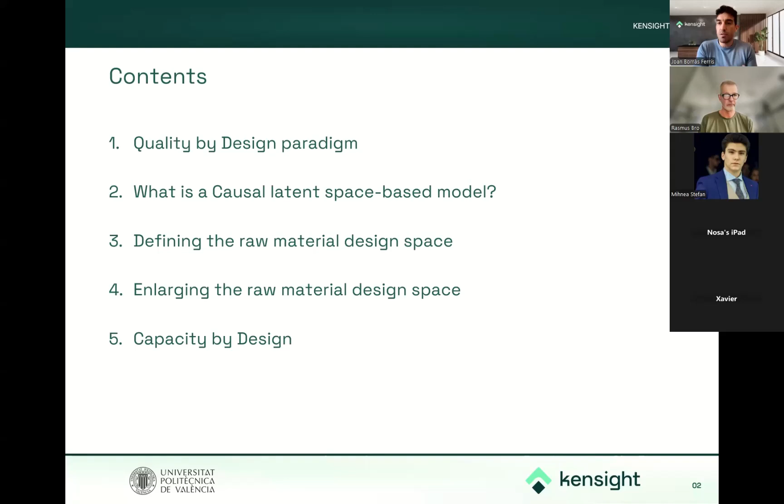So these are the contents of this webinar. First, I will talk a little bit about the quality by design paradigm, then about the causal modeling, and finally, I will talk about the 3 applications where we will use these ideas.

So first, the quality by design paradigm. For that, we have to understand that we can summarize a process using the idea of the input variables, where we have, for example, raw material properties and some process variables, and then we have the quality space, the Y space, which is also called the critical quality attributes.

So in the quality by testing paradigm, let's say, we focus only on the quality space. If we want to ensure the quality of our product, we have to test, to check the properties of the quality. But sometimes this is a problem because we cannot test everything, or it's quite expensive, and because we have to wait until the end of the process.

For this reason, another paradigm arises in the pharma industry, which is called the quality by design paradigm. Now, we don't focus only on the quality space, but also on the input space. We look at the raw material properties and the process variables. So now we don't have to test everything, and we don't have to test a sample of the quality.

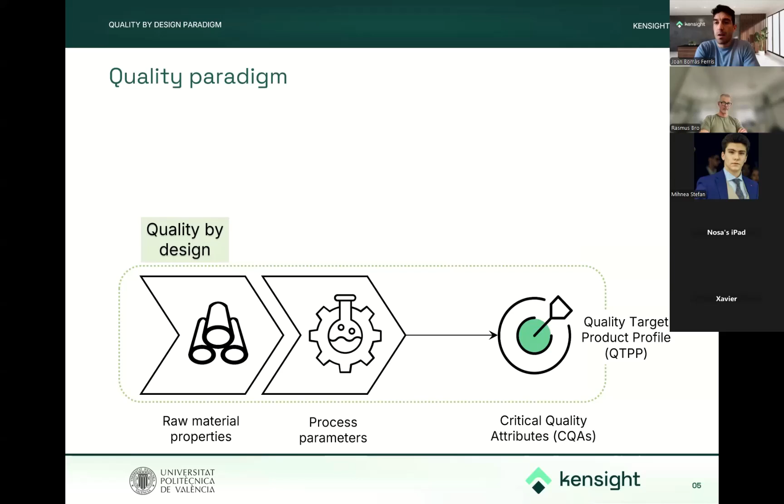We define the quality target of our quality space, and then we look at the space of the quality by design paradigm, where we have the knowledge space. It consists of everything that we know about the process. Then we have the control space. The control space contains the normal operating ranges, and then we have the design space.

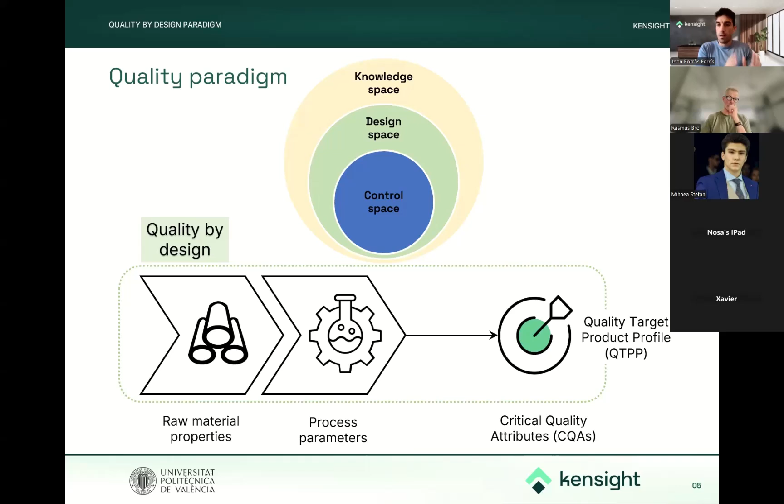The design space is very interesting because it's related to the quality target. This is the multidimensional combination of the raw material properties and the process variables which guarantee the quality of our process. So now we are interested in defining properly this space, because if we are able to do that, and if we work within this space, there is no need to test everything. We ensure the quality of our product looking at our process, the raw material properties and the process variables.

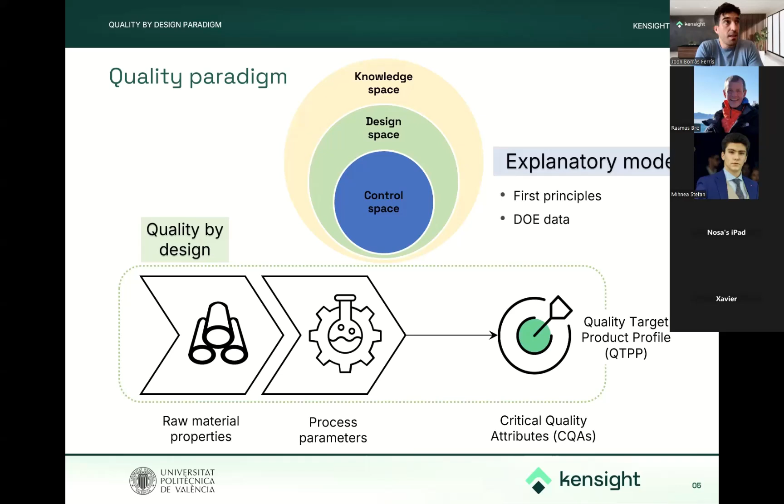But for that, we need causal models. We need explanatory models. And we can build these models using, for example, first principles or data from a design of experiments. But what is the problem in Industry 4.0 when we look at the processes? That if we look at the box of the data from DOE or first principles, it's empty. It's quite difficult to find this kind of data or information.

So it's difficult to build this kind of explanatory model, which are causal. But otherwise, we have a huge amount of historical data, which is called the so-called happenstance data. But be careful, because we can use this data to build predictive models, which take into account the association between X and Y, but not the causality from X to Y.

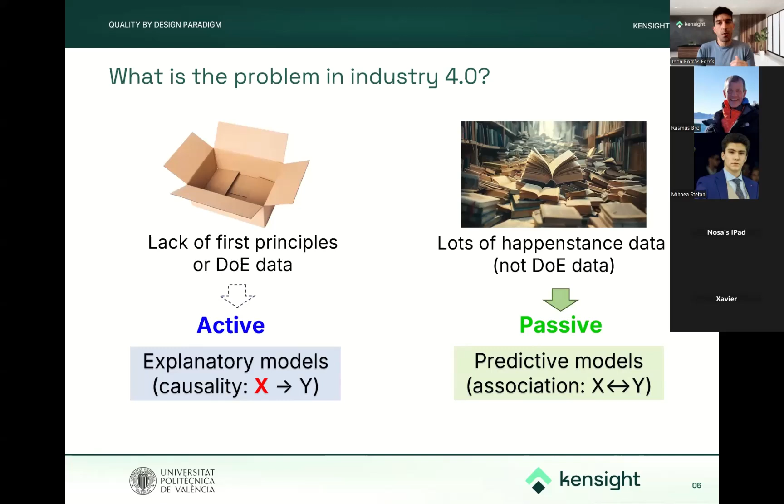So I know that there is a temptation to try to build these explanatory models using historical data, but be careful. According to the warning of Professor Box, we cannot do that. We cannot infer causality in the original space using historical data. But there is an idea from Jaeckle and MacGregor where we can do it using latent variable-based models. So now we are going to see quickly these models.

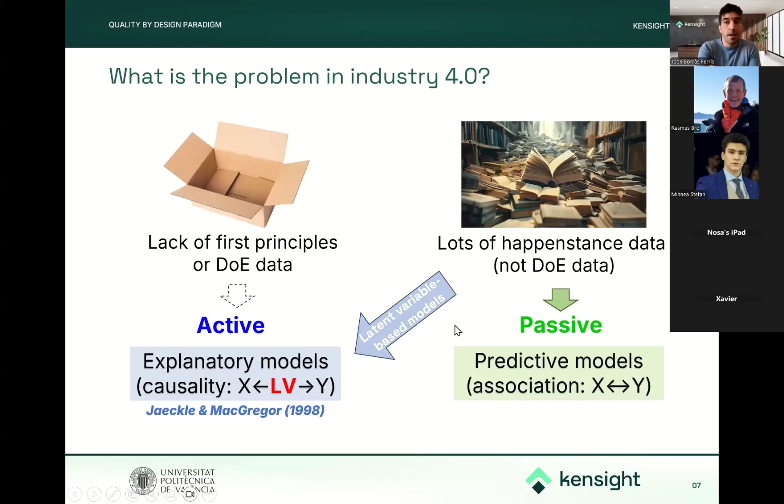As Professor Rasmus Bro said, there is a webinar Alberto did 2 weeks ago, and he explains very well the idea of these models. Anyway, I'm going to talk only a few minutes about them to remember the main ideas. So these kinds of models are, for example, partial least squares regression, which is also called PLS. And to understand this model quickly, here we have a simple example where we have 3 input variables and 3 quality variables. And we build a PLS model using only 2 latent variables. So here we summarize both spaces in only one.

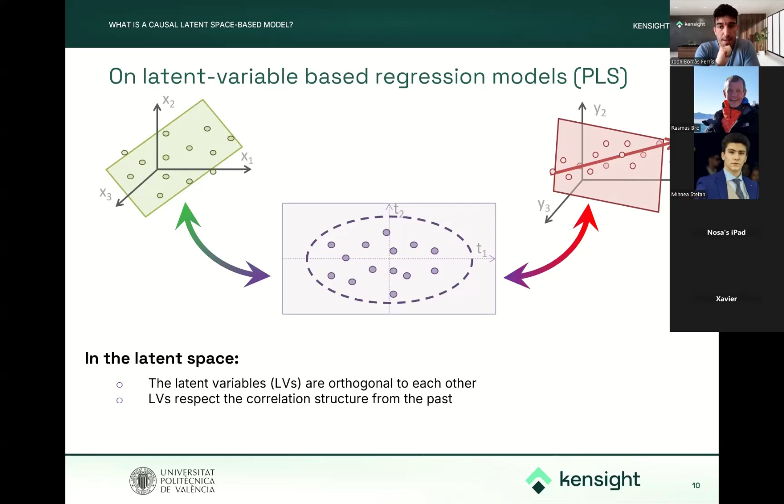So regarding the properties of PLS, we know that the latent variables are orthogonal to each other, which is very important because now we can move one of them independently from the other one. They respect the correlation structure from the past. So if we have a solution in the latent space, we know that it will be feasible because it respects this information. And here we not only model the relationship, but also provide a model for both spaces.

So taking into account these properties, Jaeckle and MacGregor explain that it provides uniqueness and causality in the reduced latent space. But what does it mean? Does it mean that if we have a movement in the X space, we will know the movement in the Y space? Of course not, because that means causality in the original space. So what Jaeckle and MacGregor said is that if there is a movement in the latent space, we will expect a movement in both spaces. And we will know that this movement in the latent space will respect the correlation structure from the past. So we are constrained to the latent space. So we talk about causality through the latent space, through the latent variables.

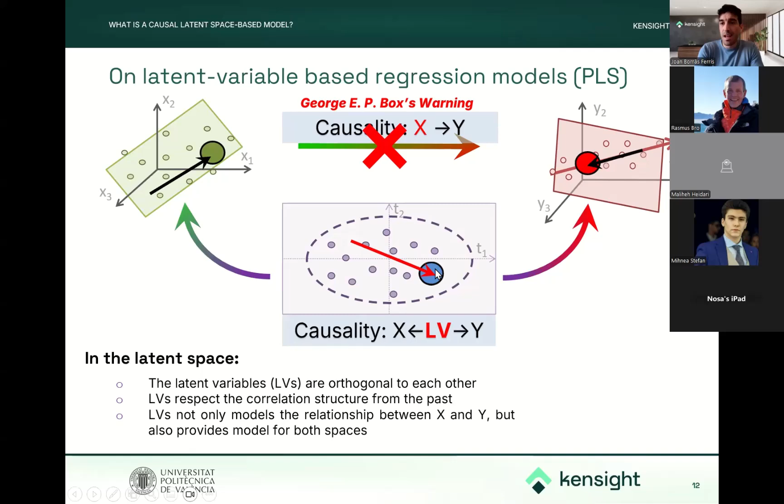So anyway, I would like to be cautious. For that reason, I would like to use this example of the ladder of causality from the Book of Why, which is a very interesting book. According to this book, there is not only one meaning of causality. There are different meanings of causality. Indeed, there are different degrees of causality. For that reason, they use the idea of the ladder of causality. There are different steps. In the first one, for example, we have association. There, in fact, there is no causality, only correlation. It's useful for prediction, but not for understanding things.

Then we have the causality-in-mean. Here, we can understand how a movement in the X space influences a movement in the Y space. And then, in the last step of the ladder, we have actual causality. Here we have scientific knowledge, we have process understanding. We use first principles. So I would like to be cautious. When I talk about causality through the latent space using historical data, of course, we are not in actual causality. But I guess that we agree that we have something more than only association.

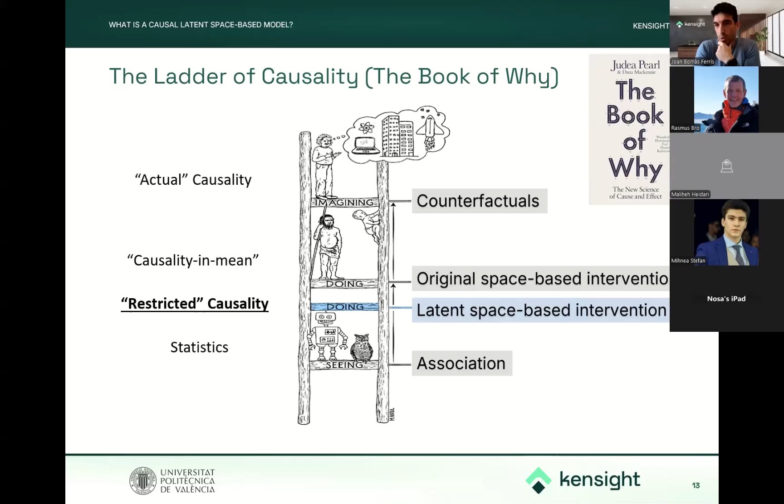So we are in the middle between association and causality in the original space. We have causality in the latent space, as Alberto explained in the last webinar. And this is the so-called restricted causality. We are restricted, we are constrained to the latent space. So now we are going to see how to use this idea in different applications. The first one is the definition of the raw material design space.

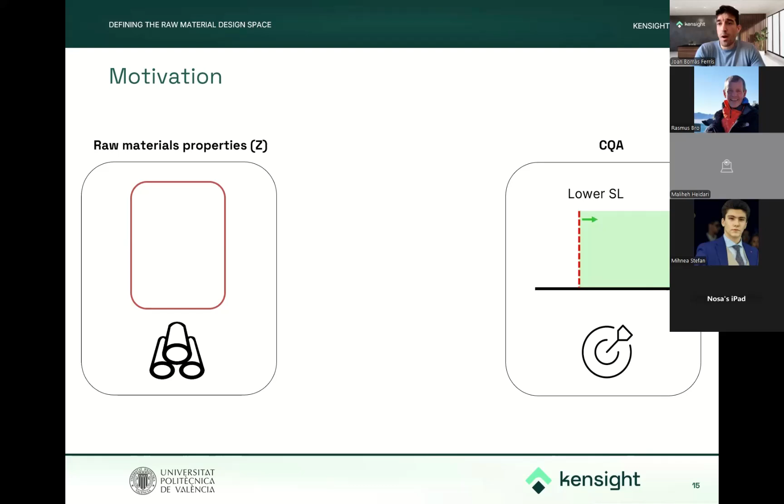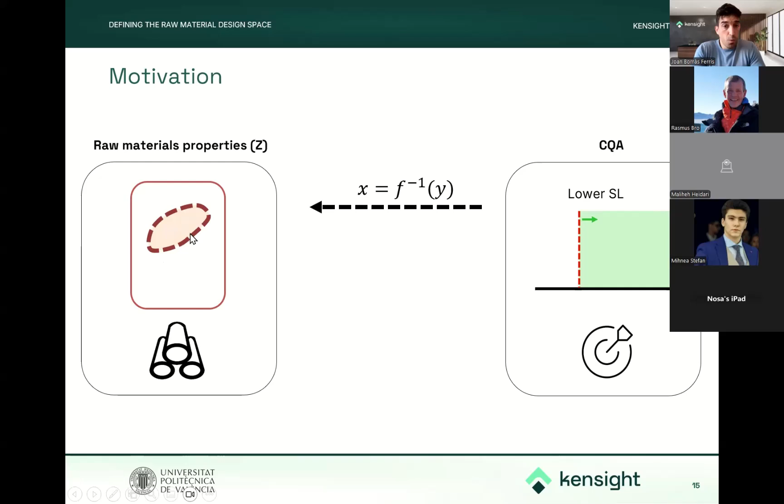And first, I would like to motivate this point. For that, we have the raw material properties, the raw material space. They are input variables. And then we have our quality, our critical quality attribute. So as we saw, once we define the quality target, in this case a lower specification limit, we can use a model. We have to carry out the model inversion to define a window. This window is the raw material design space, the raw material specification. So if we work in this window, we will guarantee the quality to be higher than the lower specification limit.

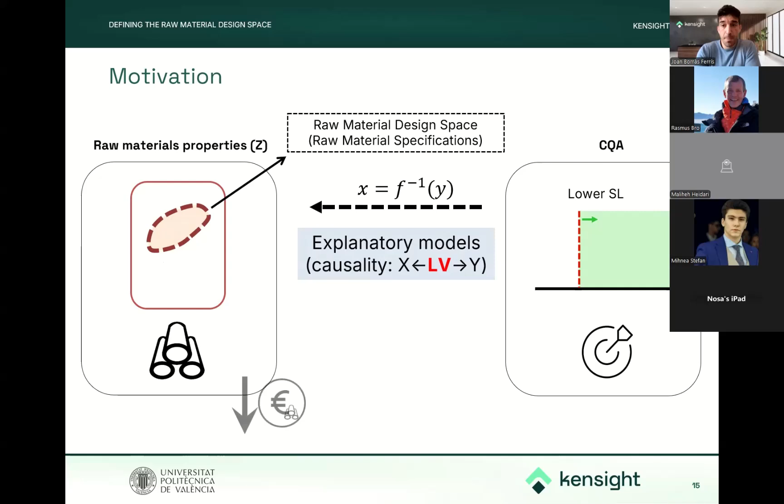And for that, we need to use an explanatory model. And I'm going to show you how to do it using PLS. If we do that properly, we will be able to reduce the price of the raw material.

So again, we have the PLS model. We have now 3 raw material properties and only 1 quality property for an illustrative purpose. So if we define a desired value of the quality property, the lower specification limit, we know that we can use the PLS model to carry out the PLS model inversion, where we have a system of matrix equations. And we have as many equations as y variables, in that case, only 1. And we have as many unknown variables as the latent dimensionality, in that case, 2.

So since we have more unknowns than equations, we don't have only 1 solution. We have multiple solutions. It means that there is a space which is called the null space, which guarantees the same value of the quality property. In that case, the lower specification limit. And then we can go from the latent space to the raw material space, because the latent space is linking both spaces. So if we want this value, we only have to move along the null space.

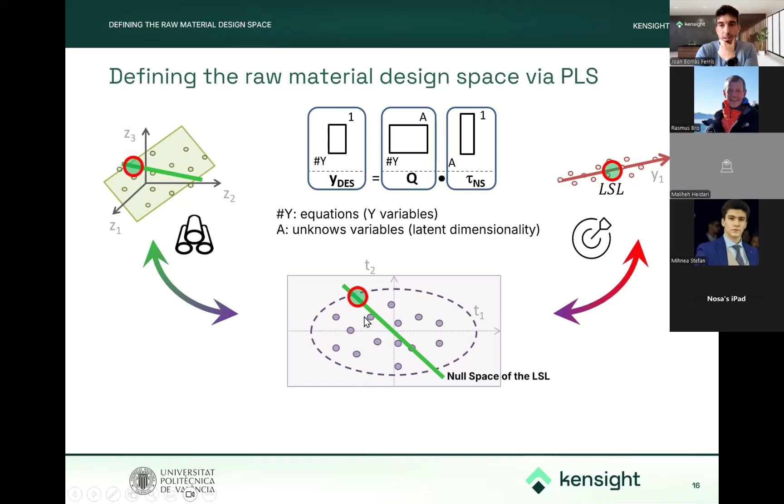Now, if this is a lower specification limit, we want the quality to be higher than the lower specification limit. So now there is a multiple space, the yellow one, where this constraint is satisfied. This is the design space, but without uncertainty. Be careful about that, because once we receive a raw material batch, we can project this batch. For example, this blue circle is a new batch which is projected. First, we have to take into account the SPE, the square prediction error, to check that this raw material batch is following the correlation structure from the past.

If it happens, now we can look at the latent space. And we see that this new batch is indeed in the same null space. So according to the prediction, it will respect this condition because it will be equal to the lower specification limit. But we have uncertainty, and we have to be careful because due to the uncertainty, we can define the prediction interval. And sometimes the final quality property will be higher, and other times will be lower. So there is no assurance of quality.

So here we propose to take into account the uncertainty. How? We are going to define a new point where the lower prediction interval matches the null space. So if we do that and we take into account the leverage, because the uncertainty changes, we can constrain this design space without uncertainty, and we end up defining a new space. This is the high confidence design space. And in that case, since we are talking about raw material properties, they are our multivariate specifications for the raw material, which are defined in the latent space.

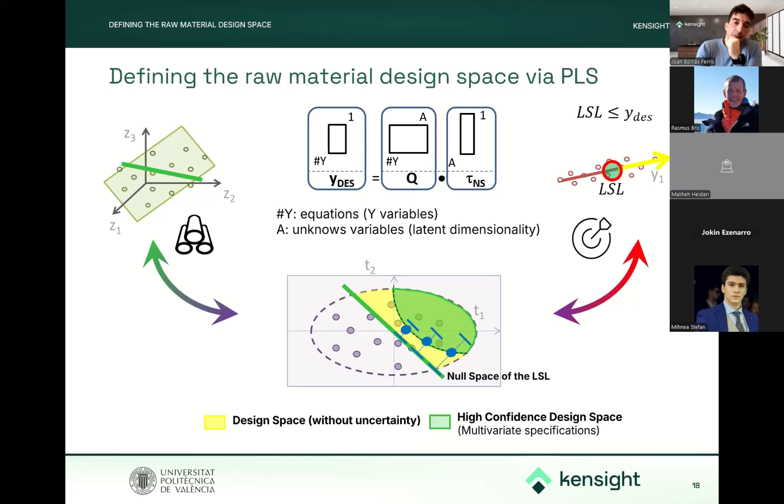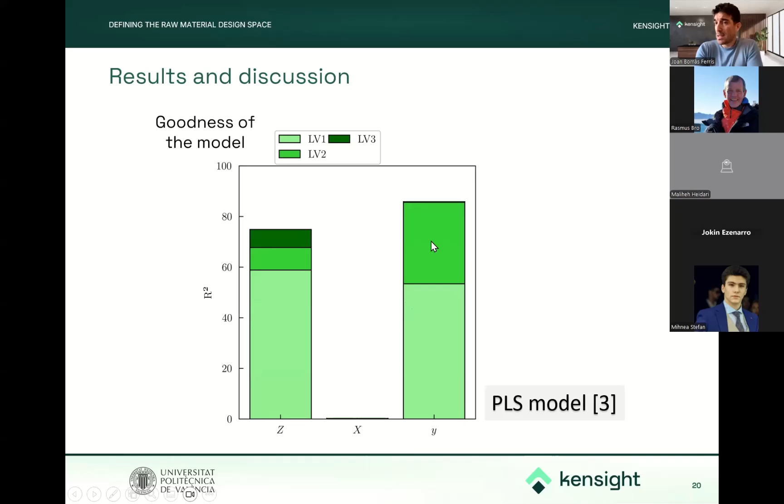And we are going to see this idea in a real case study, where we have 12 raw material properties and only 1 quality property. And we define a lower specification limit. As we saw, we want the quality property to be higher than the lower specification limit. We build a PLS model using 3 latent variables. Here we see the goodness of fit of the model, and we see that we are able to explain quite well what is happening in the quality space using only the raw material information. So this model is modeling the impact of raw materials on the quality. Here we have our score plot.

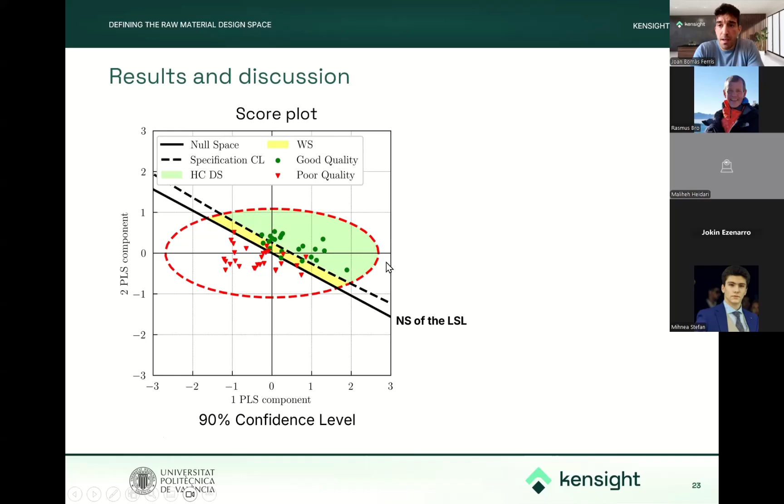And here we can apply the idea of quality by design, which is called real-time release. Once we check that this batch is in this region, there is no need to test our product. We know that there is assurance of good quality. So we can accept this batch and there is no need to test it.

Then if we are in the yellow area, which is called the warning space, it means that if we accept these batches, they will be in an area where the prediction will be higher than the lower specification limit. But due to the uncertainty, we will not be sure about that. So our recommendation is, okay, if you want to accept it, do it, but don't use the idea of real-time release. There you should test.

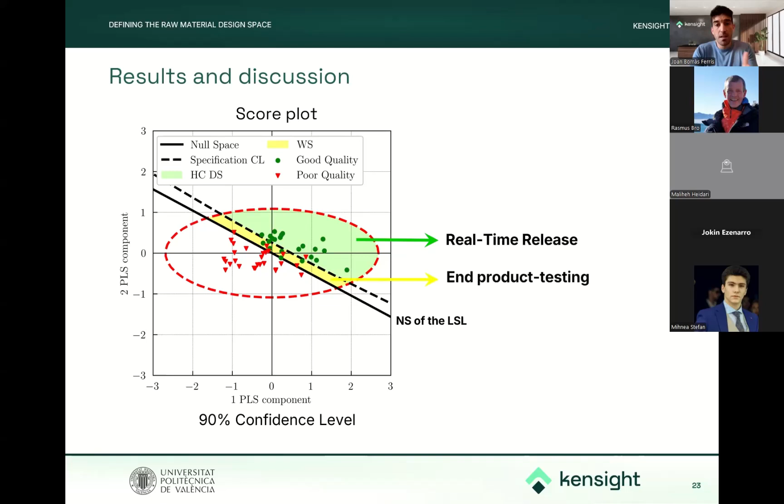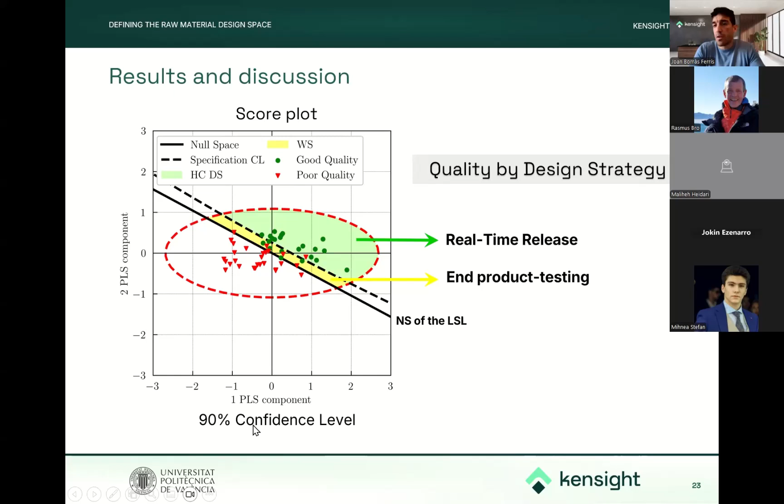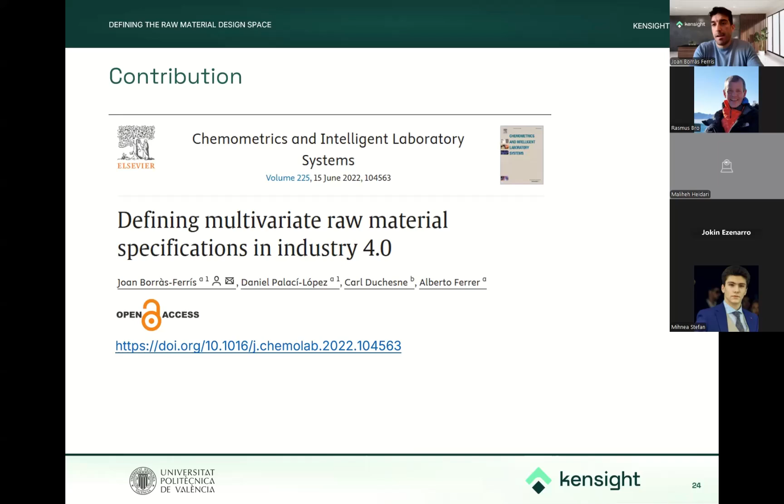So at the end, we provide a kind of quality by design strategy, where you know what to do according to the batch in the latent space. For example, this high confidence space was defined considering a 90% confidence level. The user is able to choose the level. And this idea was published in ChemoLab and is open access, just in case you want to read it and have more detail about this approach.

Now, we are going to see the second application. We have been able to define properly the raw material design space, but we want to enlarge this space. How to do it? So let's motivate this point. We have seen that we are able to define properly the window of the raw material space that guarantees the quality of the final product. So if we accept batches which are within this window, we will expect to get good quality.

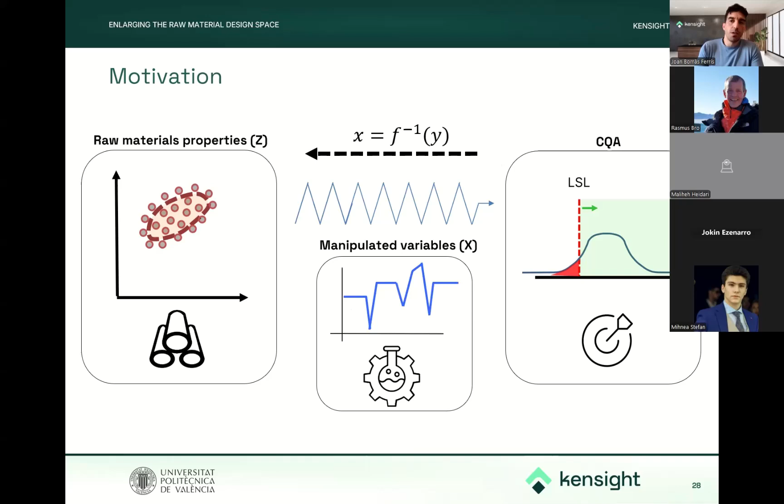But what happens if we accept more variability, which is outside this window? This variability will be transferred to the quality space, and we will get bad quality. So here the idea is that we know there are other kinds of variables affecting the quality, which are the process variables. So we are going to see if it's possible to manipulate these variables in a smart way to mitigate the raw material variations, to compensate this variability, and to get good quality at the end.

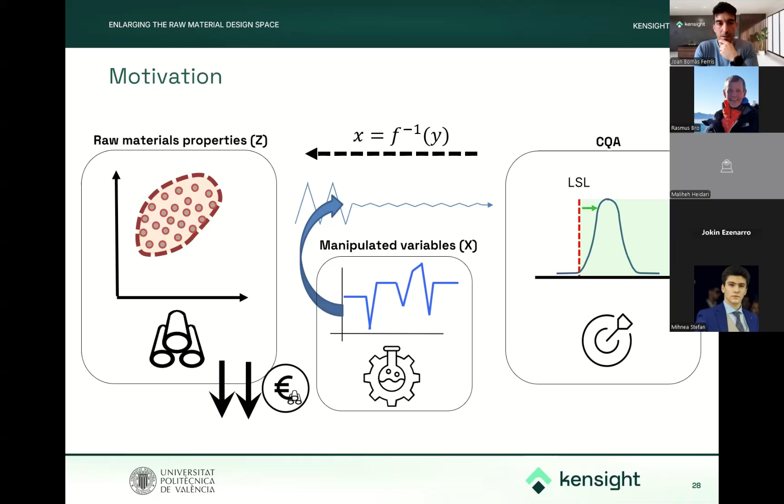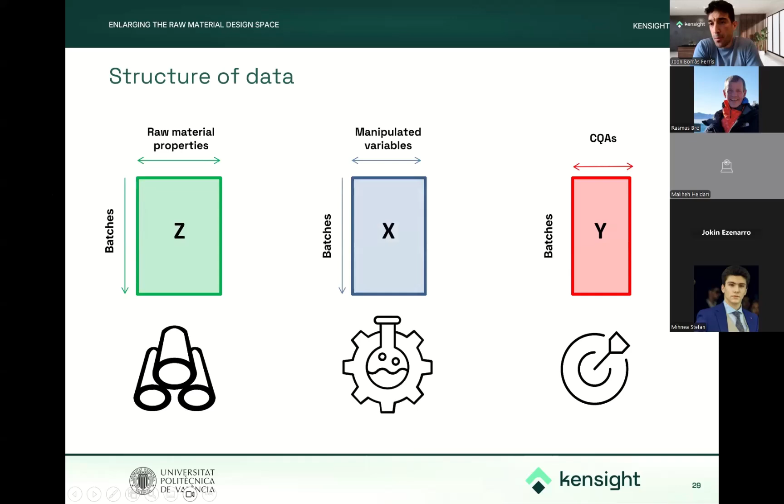If we are able to do that properly, we will be able to enlarge our raw material design space, which will decrease the raw material price. So now we don't have only the raw material properties and the quality properties, but also the manipulated variables. And we are going to use another version of PLS, which is called sequential multi-block PLS. I don't want to waste a lot of time explaining this algorithm, but the main idea is that it works as PLS in the sense that it models the input space and the Y space, but now in the input space we have different blocks, not only one.

What is very crucial, we know the flow sheet of these blocks. We can use our knowledge about the input space, and we can give this knowledge to the algorithm. So now we know that we have first the raw material properties, and then the influence of the process variables. So we are going to use this information to build a PLS model in 2 steps. First, we will model the first latent block, which takes into account the impact of the raw material properties, but also the correlated part of the process variables.

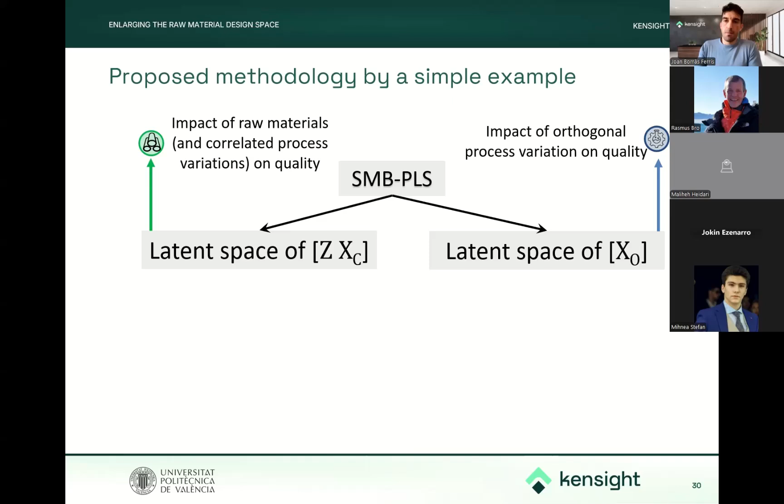Why? Because we cannot infer causality in the process variations which are related to the raw material properties. We can do it in the orthogonal part. And the second latent block is going to model the orthogonal part of the process to the raw material properties, which is related to the quality. And we are going to use this information to mitigate the raw material variations.

So here the idea is, would it be possible to manipulate the orthogonal part, which is orthogonal because this latent variable is orthogonal to the first latent block? So a priori, we are able to do it. So the idea is to manipulate the orthogonal part to enlarge the raw material design space and to be able to accept this raw material batch. Why? Because the process variables have been able to mitigate the raw material properties.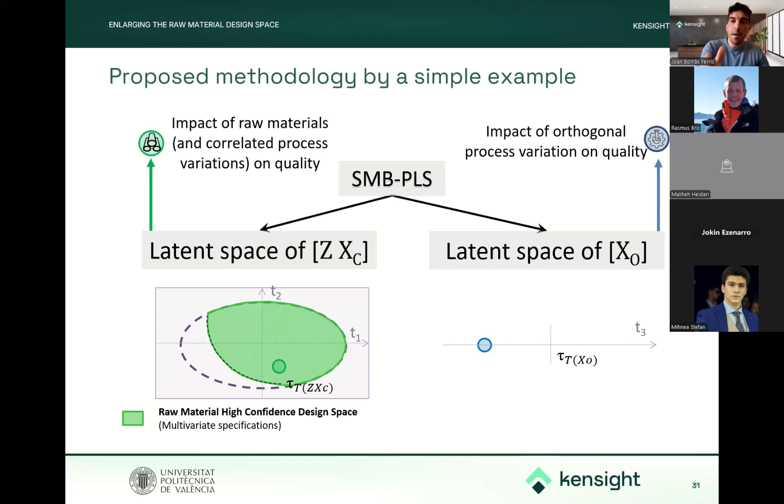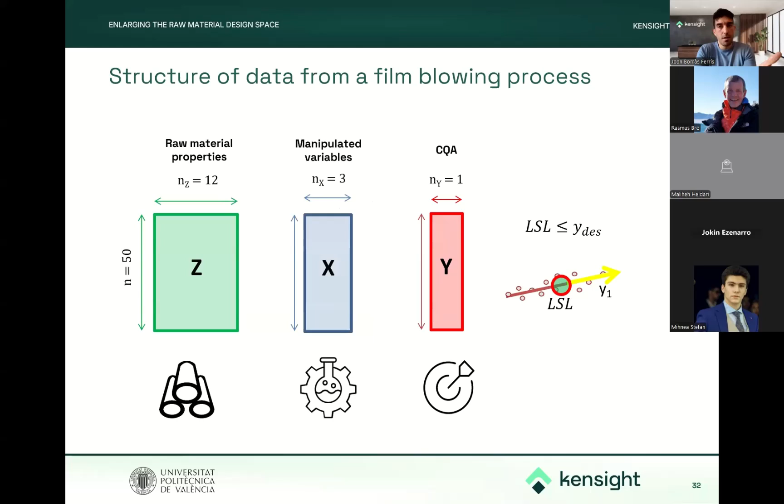And we are going to see it in the same example. We have the same example where we have 12 raw material properties, we have 1 quality property, but now we have 3 manipulated variables, and we are able to manipulate these variables. So again, we have the same goodness of fit. The first latent block has been able to model the same as we saw before, using 3 latent variables. But now we are going to use 1 extra latent variable.

But before that, look at the first model, at the first latent block. Now we are not only modeling the raw material space and the quality space, but also the correlated part of the process. So here we have variability in the X space, in the process variable space, which is related to the raw material property. So we don't want, as I said, to use this information. I want to model it in the first latent block, and I will use only the information in the second latent block, which is modeled using only 1 latent variable.

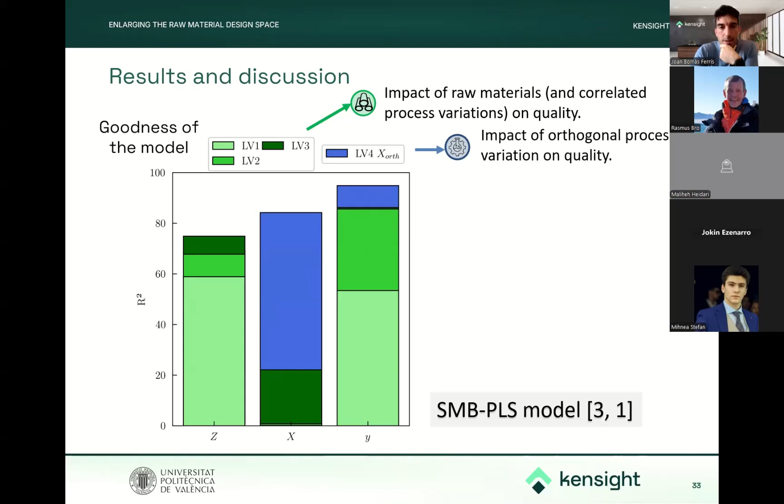So now, using only 1 latent variable, we are able to model a great amount of variability in the process region, which is slightly related to the quality. It makes sense. So now we are going to see if we are able to take advantage of this information, which is modeled by the process, to mitigate the raw material variations. So now we have been able to model this orthogonal part, which is related to the quality. And we are going to see it in this example.

So now here we see the score plot, but we don't have 2 latent variables. We have the first and second latent variable of the first latent block, and then here we have the orthogonal one. And we have been able to define the design space, doing the same we did before in PLS. We have the null space, we have the confidence limit. At the end, we define the high confidence design space, the green area.

So now once we receive a raw material batch, and we assume that we don't want to move the orthogonal part, we can project it. And we assume that the orthogonal part remains as in the past, on average. So if we assume that, we see that the raw material batch is outside. We shouldn't accept it. But look at the orthogonal part.

Before that, once we project this raw material batch, we can see the time series, the historical values of the manipulated variables, and we can see the expected value of the process according to the correlated part, because it was modeled in the first block of latent variables. So we will expect to have this value of the process variables. Okay, now look at the orthogonal part.

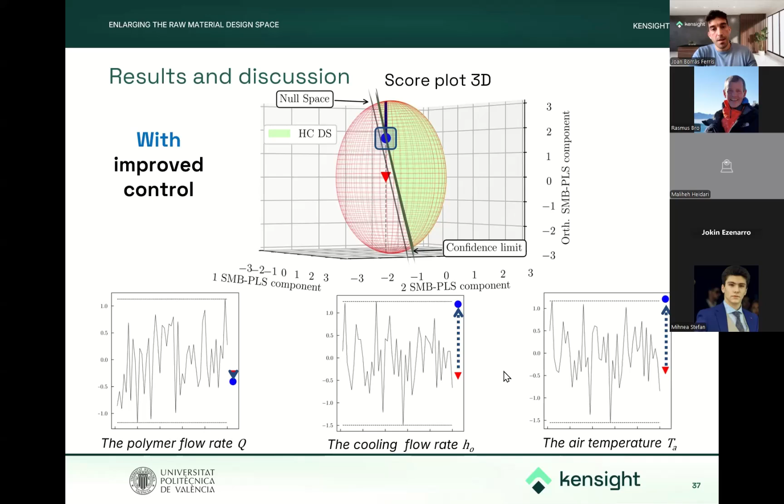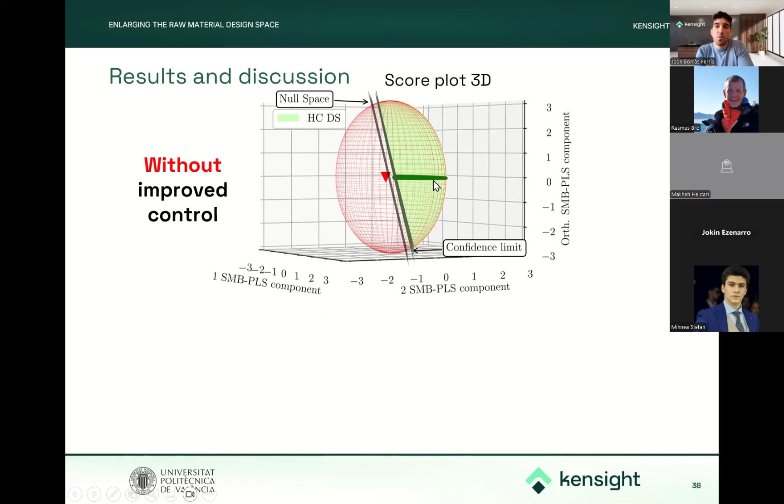So to summarize, if we don't want to move the orthogonal part, here we have our high confidence space, which is the same as we use PLS for the raw material properties. But once we are able to move along the orthogonal part, we are able to enlarge the design space.

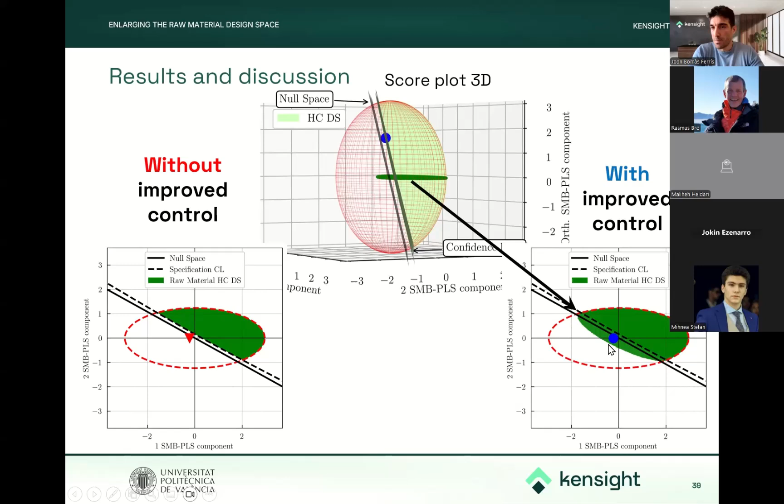Because here, this is our design space without improvement. But if we move the orthogonal part, we have to project this green area to the first latent block defined by the first and the second latent variable. And we have this new high confidence design space. We have been able to enlarge the design space, and now the same batch is within the design space, so we are able to accept it. So we are able to enlarge this space.

This idea has been published in another paper, also in ChemoLab, and you can read it because it's open access, just in case you want to go into more detail.

And now the last one. We are going to talk about capacity by design, which is totally aligned with the quality by design paradigm. Here the problem is a little bit different. Here we assume that we have different suppliers. For example, we have three suppliers, and they provide us raw material. So we want to assess them to see who is the best one.

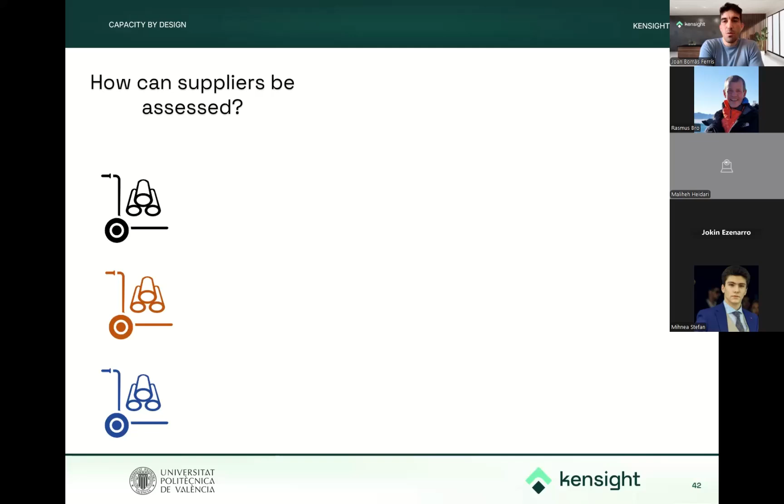So we can use the conventional capacity by testing paradigm, which means that we accept raw material from all of them, we manufacture this raw material, we test the quality, and we say okay, the first one is the best one. Why? Because the quality of the product was better than the other ones. But here we have a problem: we have to manufacture the raw material and wait until the end of the process, which increases the price of the raw material.

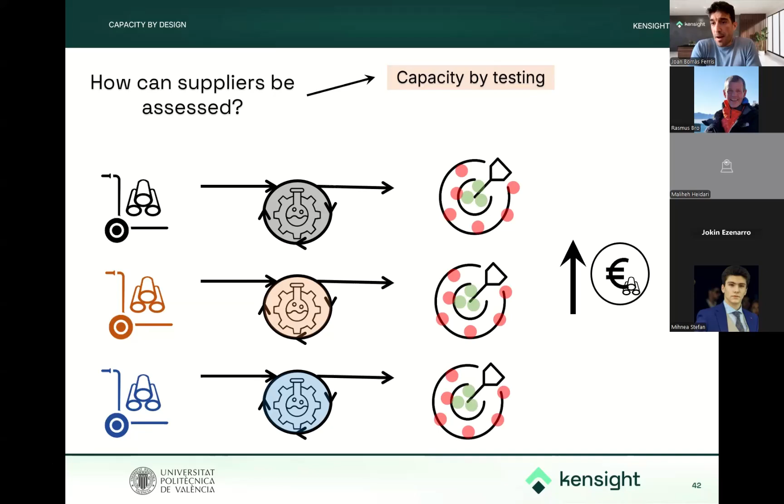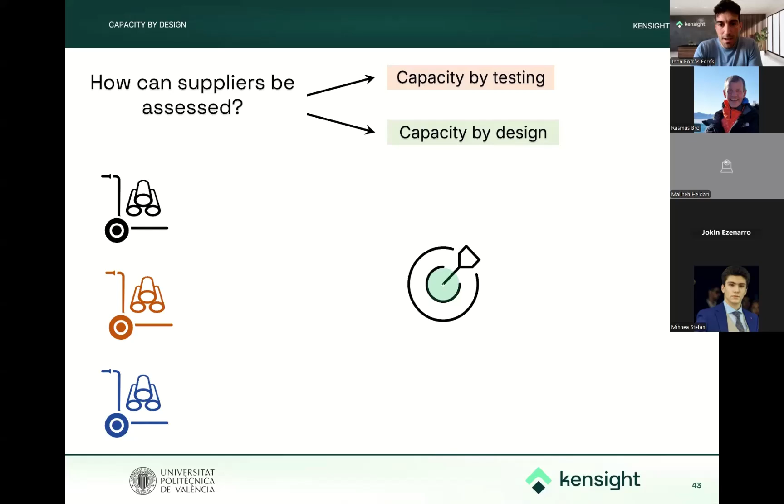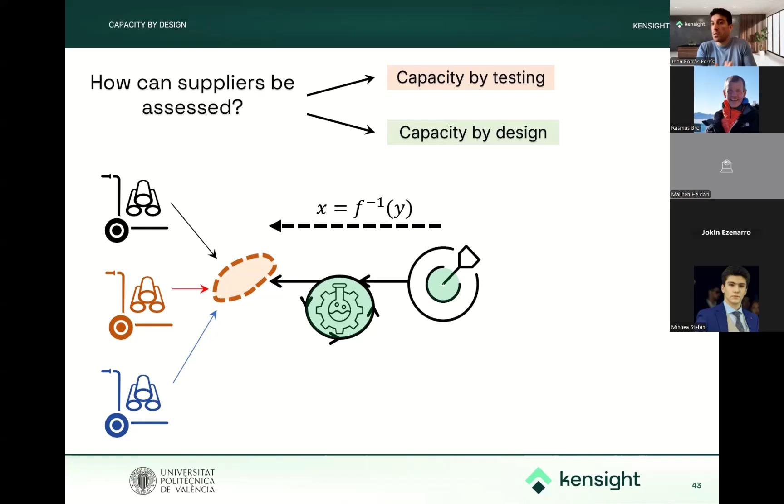But we could use the idea of capacity by design, aligned with quality by design, as we saw in this webinar. We define the quality target in the quality space. We define our window, our raw material design space. And now we see if they are able to be within this window or not. How? Asking for the properties, that's all. We don't have to manufacture the raw material. We ask for the value of the properties they are going to provide us, and we will see if they are good enough or not, and which is the best one.

So here we have the design space. It's the same as we saw before, but we have a lower and upper specification limit. We have both lower and upper specification limits. For that reason, we get this kind of cat eye shape.

Then once we receive the properties of different raw material batches from supplier number one, we can project them. We have to check the SPE, the square prediction error, and if it's okay, we can project them, and we see that we shouldn't work with this supplier because it's outside the design space. But maybe there is another supplier that we projected and is within, and there is another one that is within.

So then we can model the normal variability of each one. We assume a multi-normal distribution in the latent space. So we define an area which is called RMOS, the raw material operating space. And it means that we know where we expect to be given a supplier.

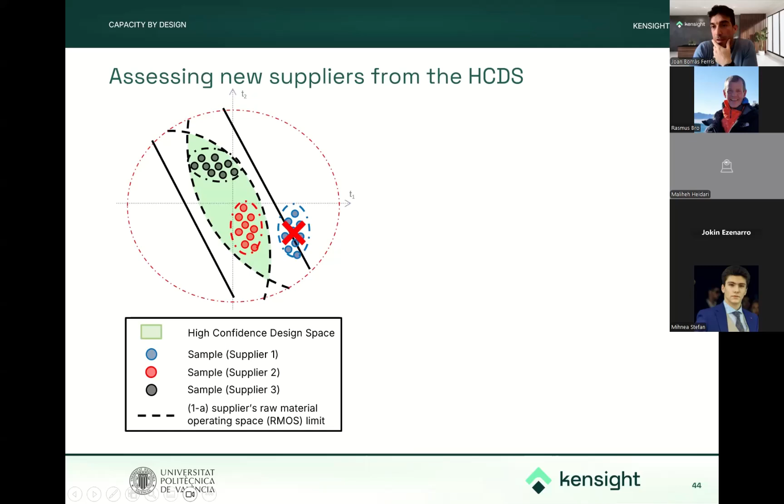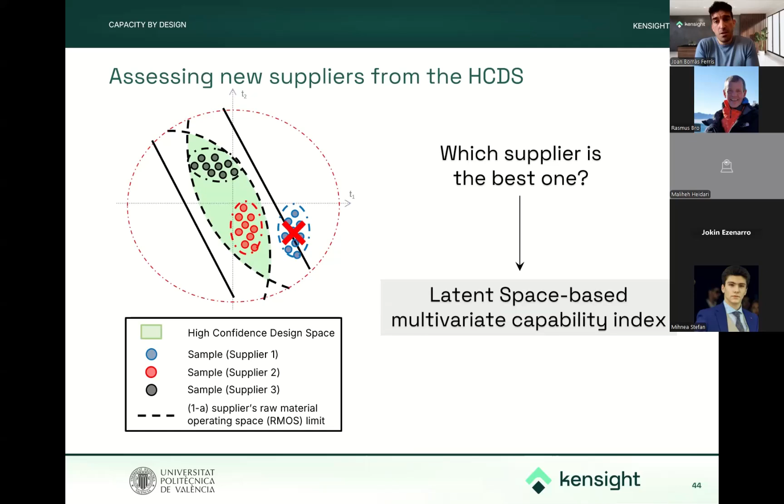So if we work with supplier number one, the blue one, we expect to be here in this area, so we shouldn't work with them because we are outside the design space. And then the red, or the black one, which is the best one, it's difficult to know. So here we provide an index, called the latent space-based multivariate capability index, to assess them, to provide a statistic to check which is the best one, the black or the red one.

For that, I'm going to show the index in the latent space, what we propose, and the capability index in the univariate space that I guess you are familiar with. Anyway, I'm going to explain both.

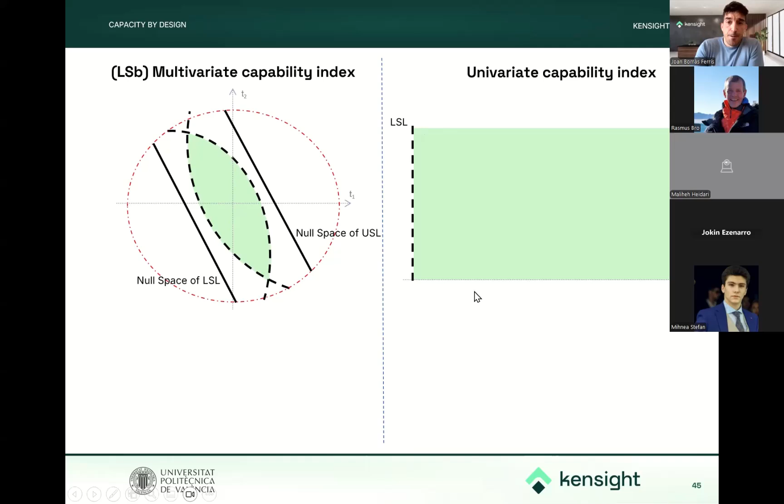So here we have our design space, our specifications in the latent space, and in the second one, we have a lower and upper specification limit in a univariate space, for example, for the quality property. So once we receive information of our supplier, we can define the RMOS, what we saw. It means that we know where we expect to work in the latent space.

And then if we want to do it in the quality space, we should manufacture all these batches to check, to test the quality, and we will get the natural variability of the quality. In the latent space, we don't need to do it, and this is very important. Then we can calculate the centroid of the RMOS and the mean of the natural variability of the quality.

Then we can calculate the distance from the mean to the specification limit. We know that in the univariate space, we have only 2 distances, but now in the latent space, we have multiple distances. Which one is the important one for us? It's the minimum one. So in the univariate case we take the minimum one, and here we take the minimum one considering the statistical distance regarding the covariance matrix of the RMOS. Why? Because it's the critical one.

Then we only have to compare this minimum statistical distance with respect to the normal variability, in the same way we do in the univariate case. But here we have a multivariate capability index, which is defined in the latent space. And we don't need to manufacture the raw material batches. We have this information only by looking at the raw material properties of our supplier.

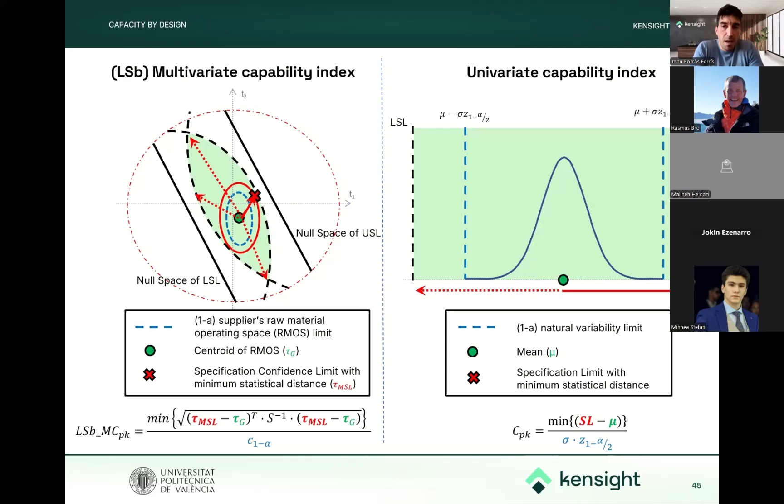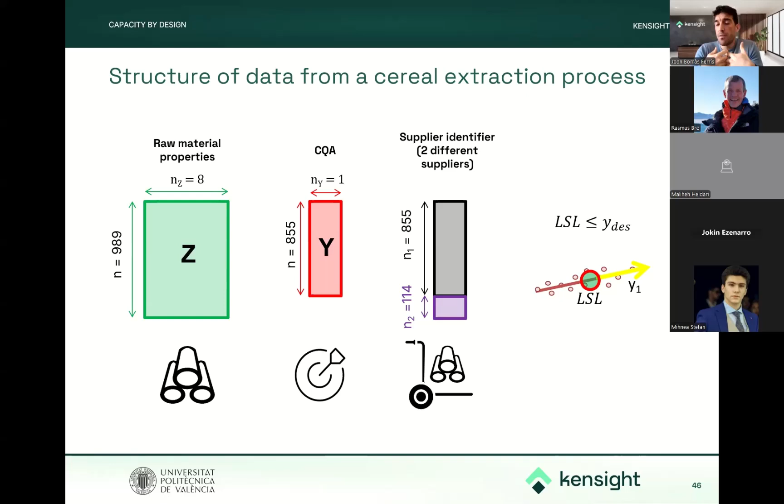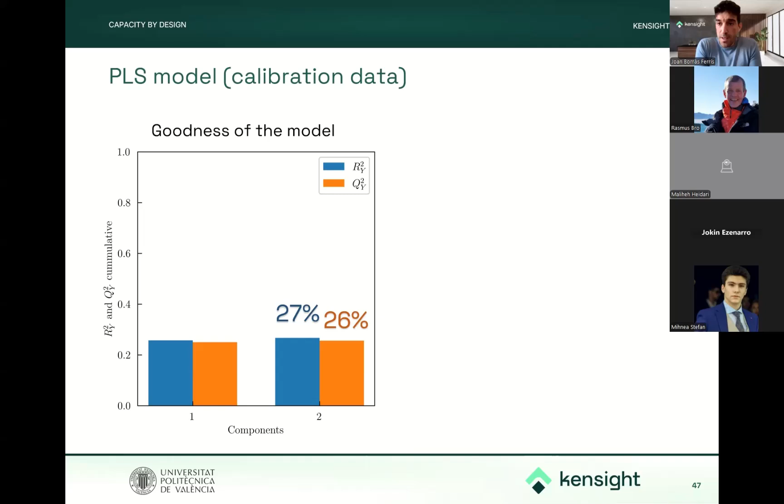And we see that this model seems rubbish, maybe, because we are able to explain only a little bit of the variability in the Y space. But if you are used to working with data from real processes, this will be normal for you, in the same way it's normal for me. When we look at real processes and data which is historical, which doesn't come from DOE, it's normal to have this goodness of fit and goodness of prediction.

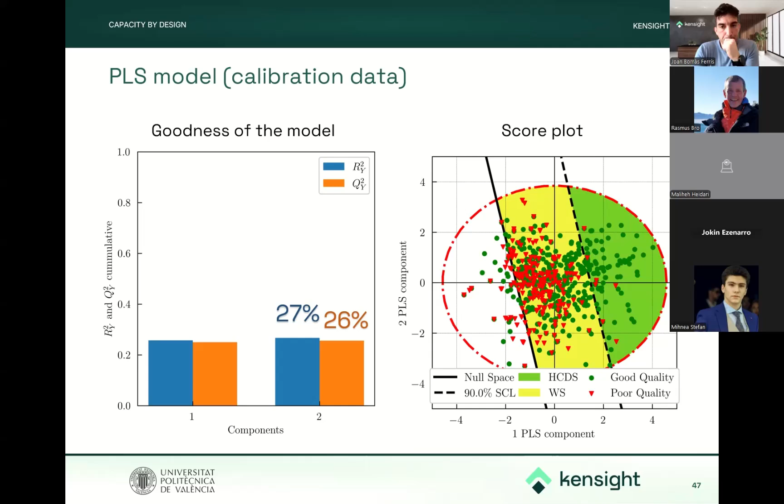Okay, but when we see the capability index of our supplier, the current one, we see that it's awful. Why? Because the centroid of the RMOS is outside the design space. We are not able to calculate this index, we have a negative index. To be able to calculate this index, at least the centroid must be within the design space.

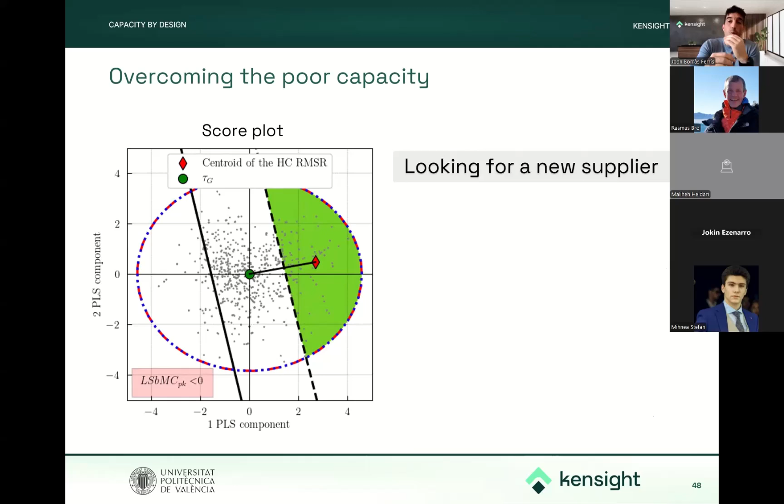So here we have two options. The first one, looking for a new supplier, and we did it. When we did it, we received information about the properties, and we were able to project these raw material properties. We saw that this new supplier was much better than the current one.

But what is the problem? The supplier was more expensive, let's say. So our client was not able to work with them. So they said to us, okay, so now do you have anything else? We can't do anything regarding what we have.

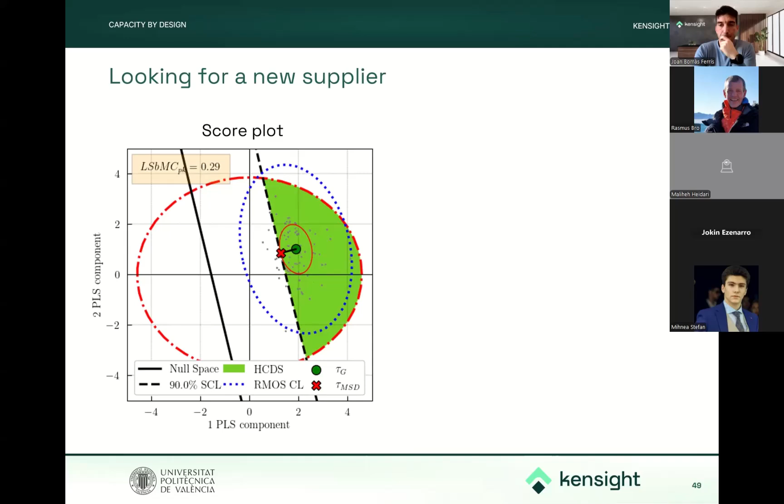Well, this is important. Here we can calculate not only the capacity index, but also the percentage, because at the end we have the normal distribution, so we can integrate this function into the high confidence design space, so we can get the percentage of batches which will be within the design space, which is quite high.

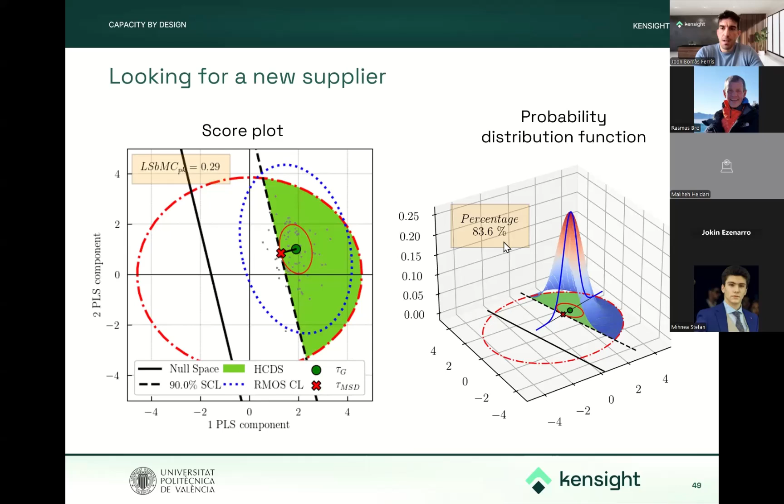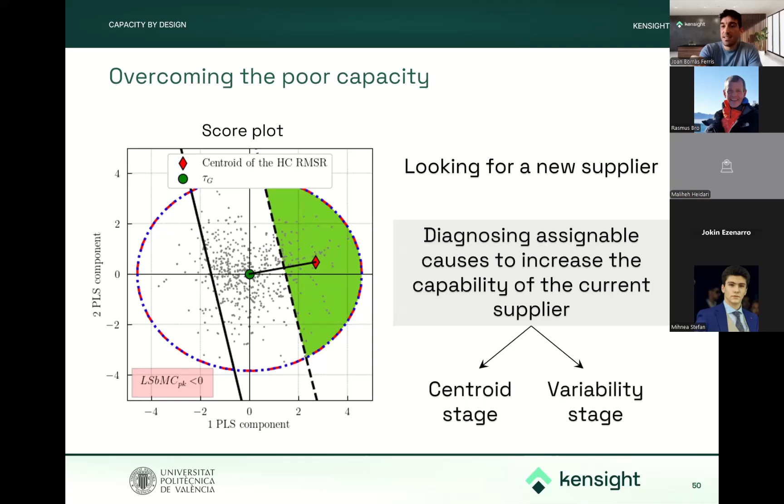But now, as I said, we have to look for another option because we cannot afford this new supplier. And the new one is to take advantage of the tools, of the properties of the PLS model. We know that we have different tools, one of them being contribution plots. So it would be nice if we are able to take advantage of these contribution plots to provide our supplier a way to improve. And for that, we use the centroid stage and the variability stage, as we will see.

In the centroid stage, we see that the centroid is outside the ideal centroid of the high confidence space. So it would be nice if we are able to provide some pieces of advice to our supplier to say, okay, if you are able to do that, you will be able to move your centroid from here to there, from the current point to the ideal one.

And we only have to use a contribution plot from the diamond to the green point. And if we increase and decrease the mean of these variables, respecting the correlation structure from the past, we will be able to move from the current centroid to the ideal point, which is the centroid of the design space.

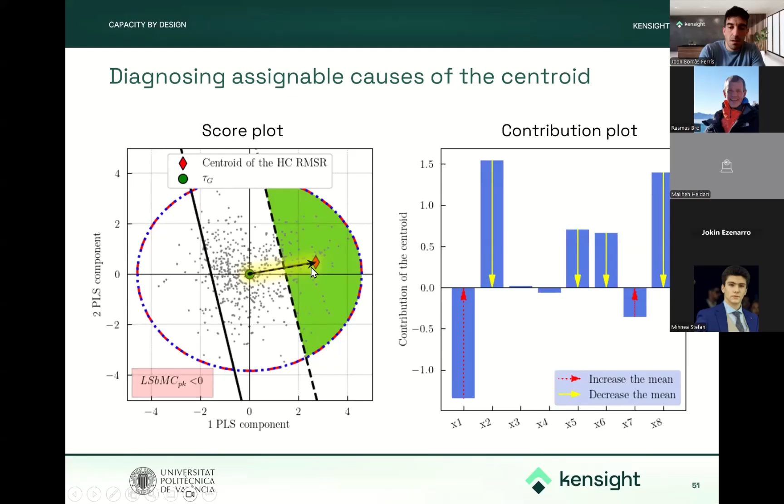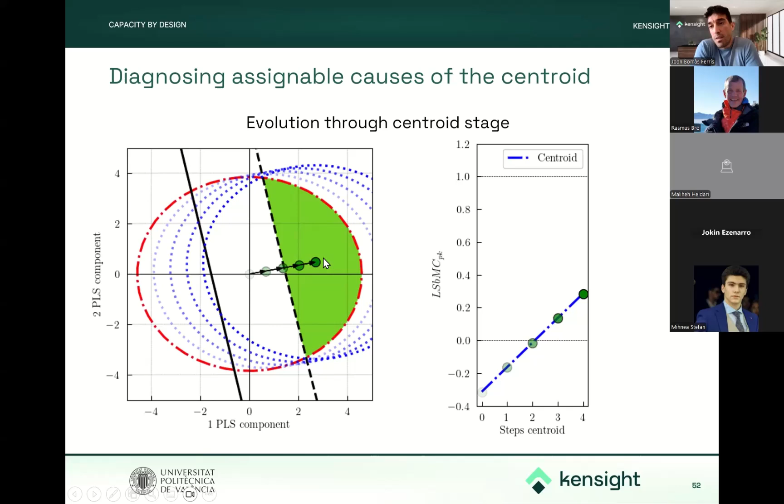We were not able to do it, but we simulated this idea, and in the simulation we were able to move the centroid from the current one to the ideal one. We did it by steps, and now we see that we have a capacity index which is at least positive, higher than 0. Why? Because now the new centroid is within the high confidence design space.

And we get, theoretically, this new RMOS. We are able to do that. Would it be possible to improve even more this capacity? Yes, we can do it regarding the variability.

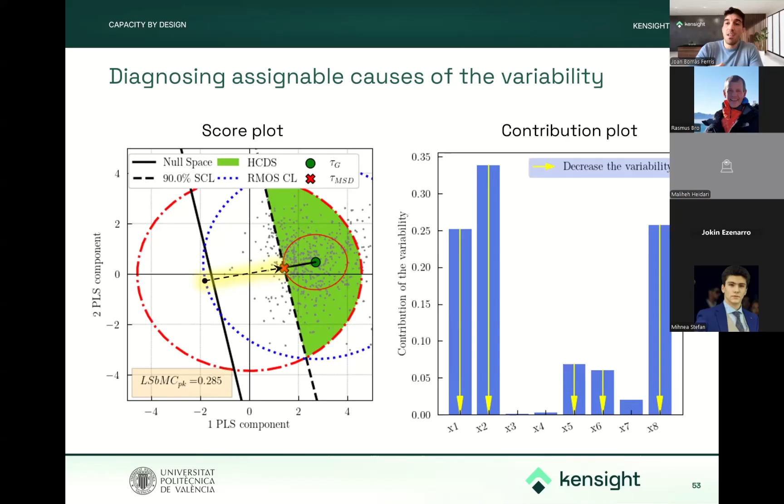For that, now we use again the contribution plots to see what variables are responsible for the critical direction, which has the minimum statistical distance. When we see the variables which are responsible for this contribution, we know that reducing the variability of these variables, we will be able to reduce the variability of the RMOS regarding this critical direction and improving the capacity. We did it by steps.

Since we did it by steps, we had to correct these contribution plots. And at the end, we were able to increase even more the capacity from this value to almost 1, which is a nice value. We know that maybe our supplier is not able to modify the properties of the raw material because they cannot do it, but at least they are aware of the problem of the raw materials.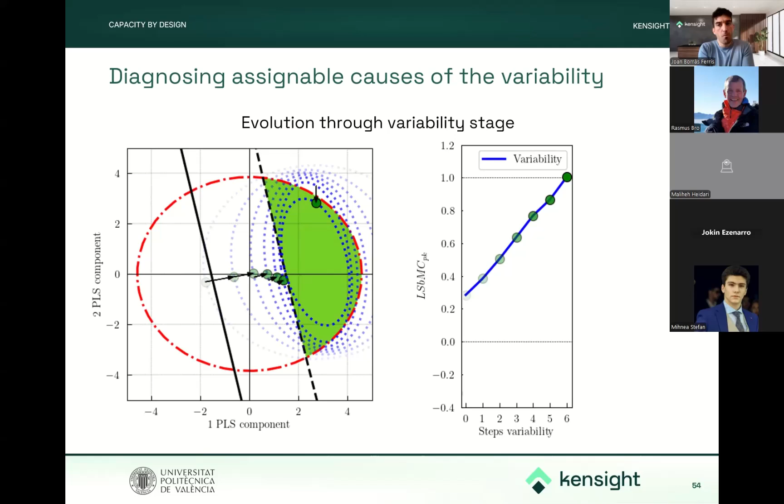And we have also been able to publish these ideas in ChemoLab. I'm sorry because this paper is not open access, but I guess we will be able to make it open access. I'm not sure, but we will try it. At least you can find it in ChemoLab right now.

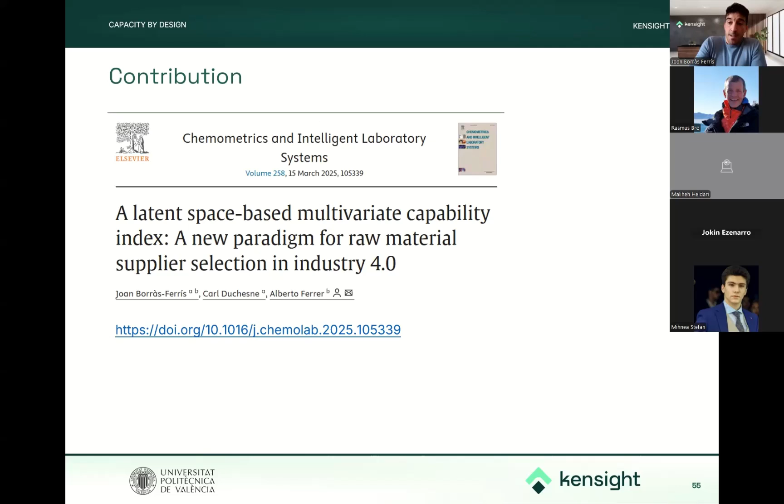I really like this. I followed Christiane Jäckle when she made her original work, and it's really nice to see how you have managed to develop this. I like it a lot.